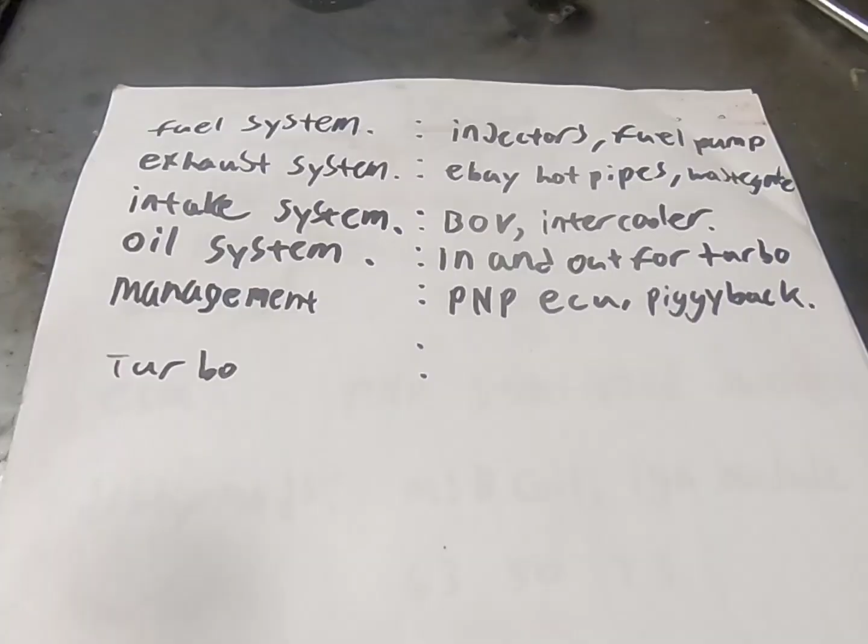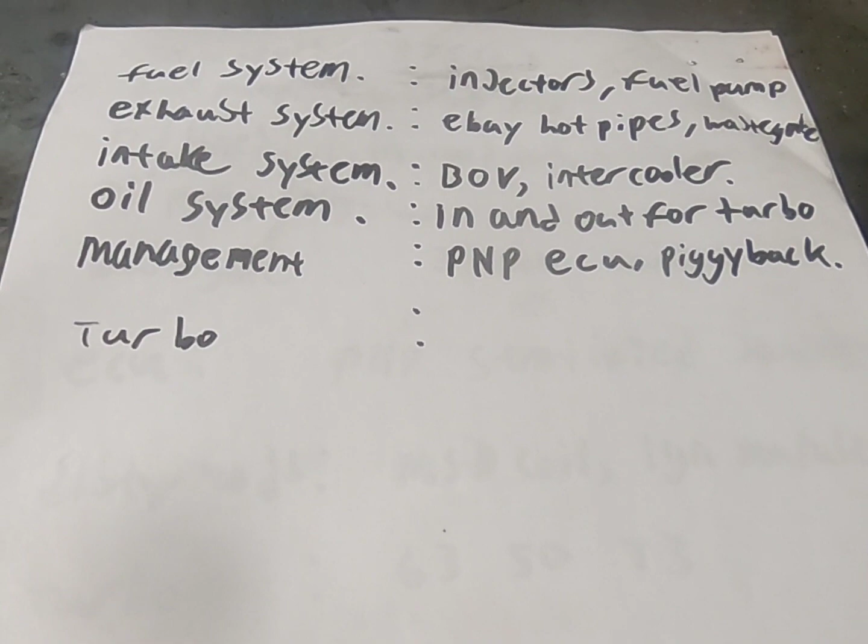There's 6 parts to turboing a vehicle. You need a fuel system, injectors, and a fuel pump. That's what you need at a minimum. And an exhaust system. You can either go on eBay, get hot pipes. You need a wastegate. You need an intake system, so you need turbo pipes from your cold side on your turbo to your intake. You could get a blow-off valve and intercooler.

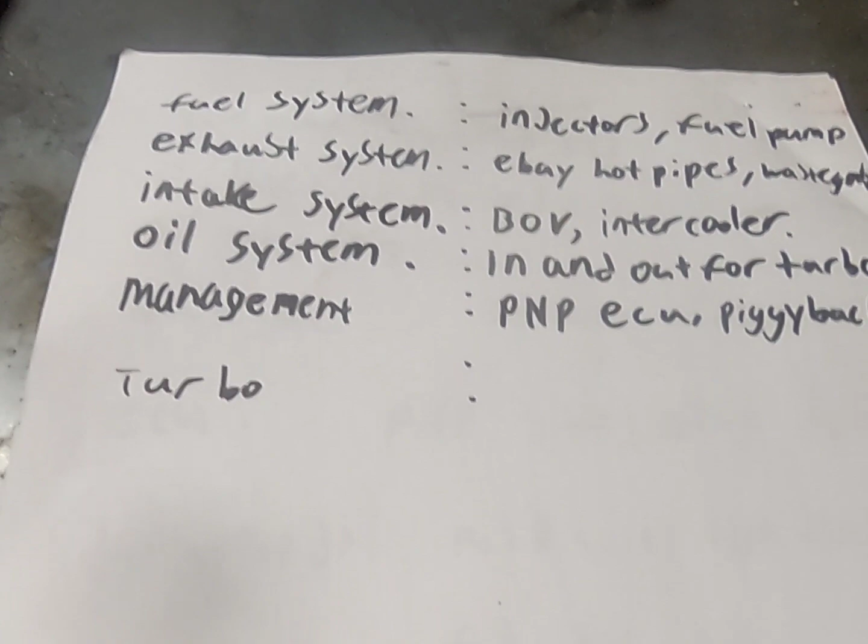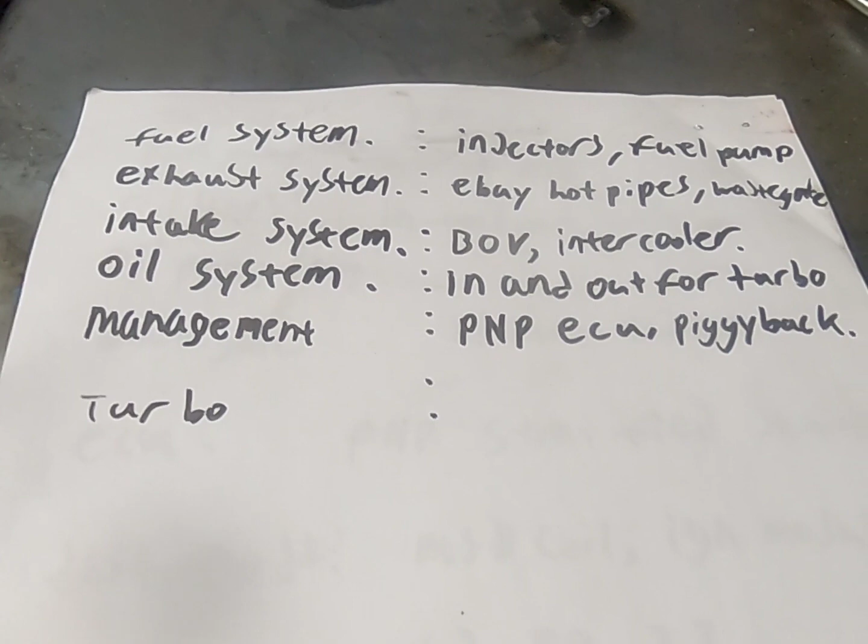You do not need a blow-off valve, or you do not need an intercooler. Those are optional. Blow-off valve is letting off pressure when it's not needed, when your throttle plate closes. And people do say you need them. You do not need them. If you let off and you don't have a blow-off valve, it will come out of the turbo. It is harder on things, but it does still work. I've used it. I've never had a problem. I've not used it, and I've also never had a problem.

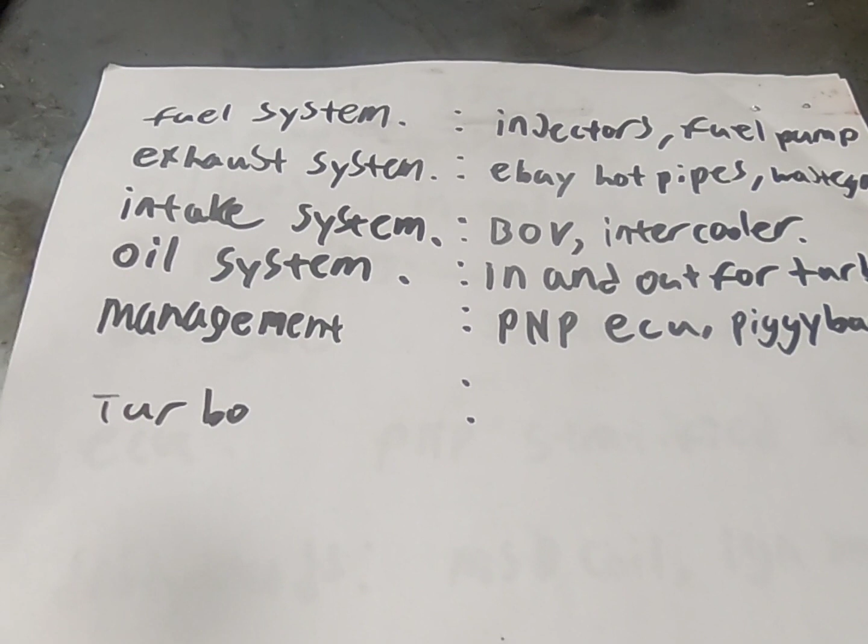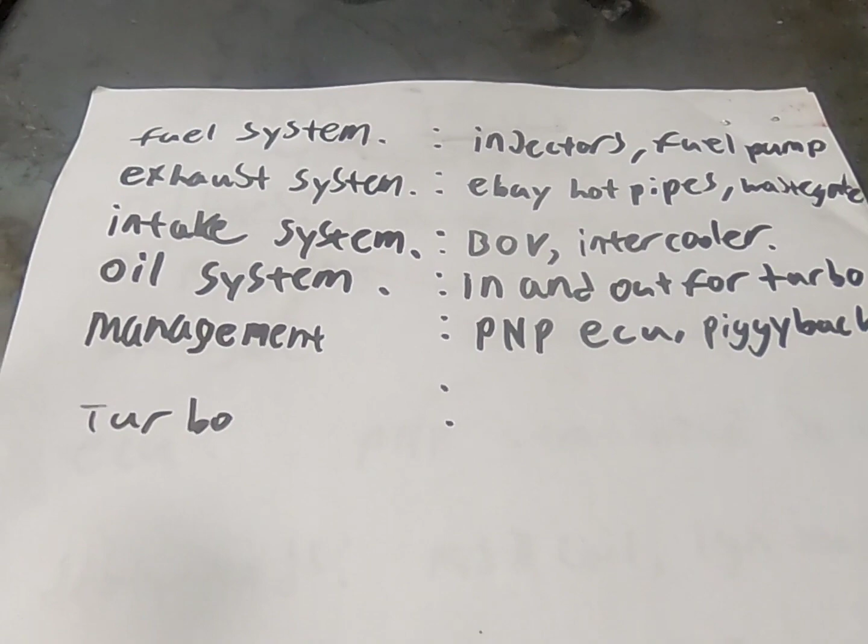Intercooler, you need it for high boost. You do not need it for low boost. That is my opinion. Anyways, your oil system, you need in and out for your turbo. You need oiling to go in your turbo with pressure from your oil pump, and you need it to go back into your oil pan. So there's other turbos that do not need this because they have their own system of oiling, so it's not connected to the engine's oiling system. But most cheap turbos, and turbos in general, have an in and an out for turbo oil.

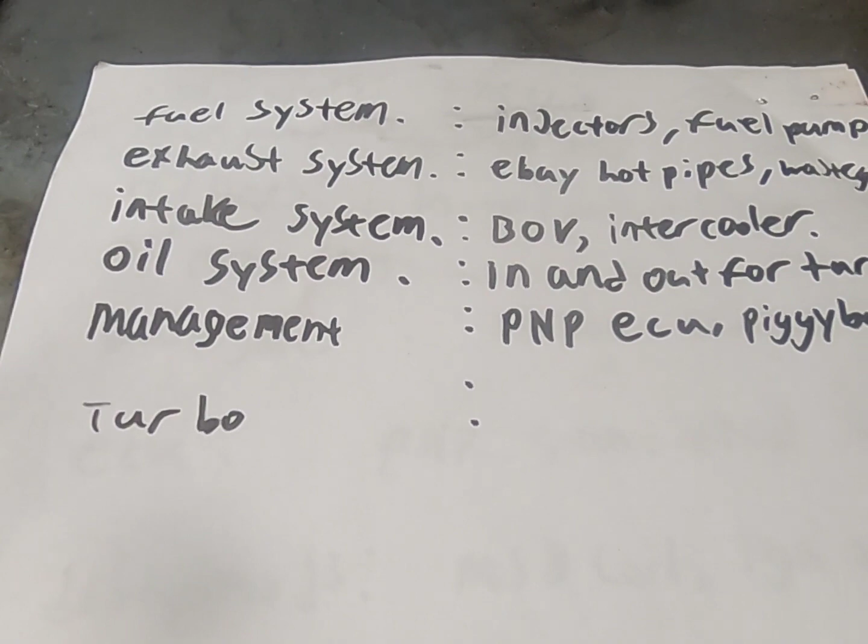And management, you need to be able to turn up the fuel for the air that's compensating, and you need to change your timing. So you either need a plug and play ECU, a piggyback ECU, or you can get somebody to flash your ECU.

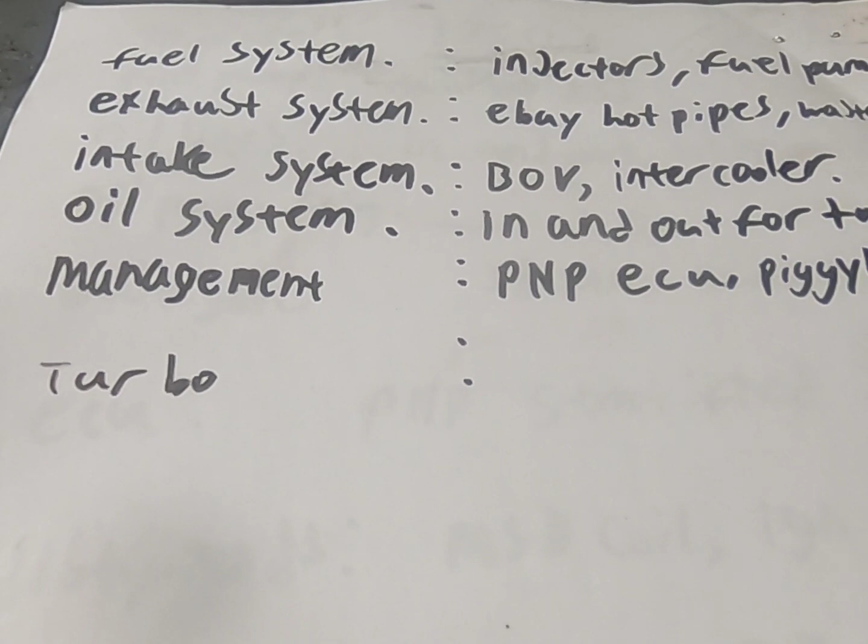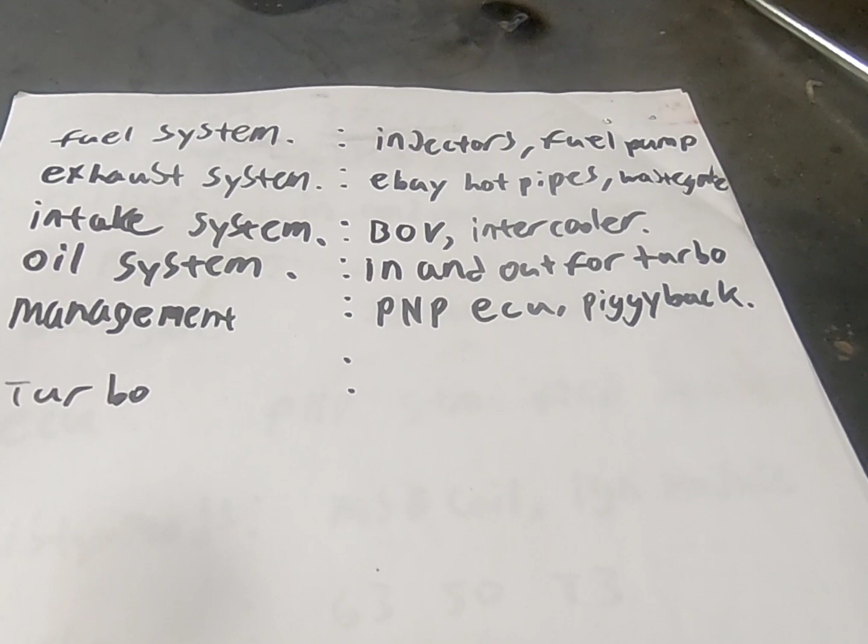And you also need a turbo. You can make endless choices on that. You can go from a small turbo, big turbo. Big turbos, they're more laggy. Small turbos, they have less lag. You can get dual scroll turbos. There's lots of options, but I'm gonna say what I'm going with so you guys can have a list of what I'm doing to mine.

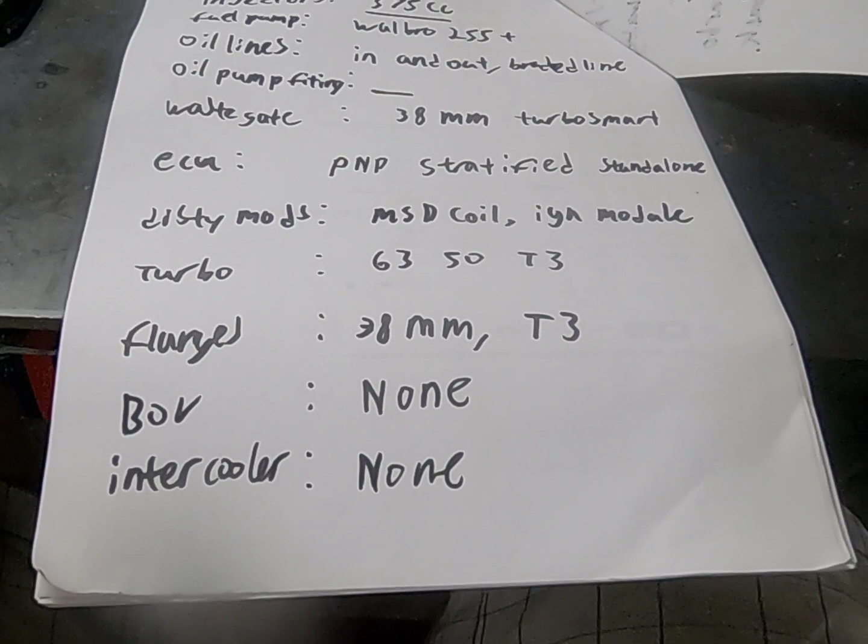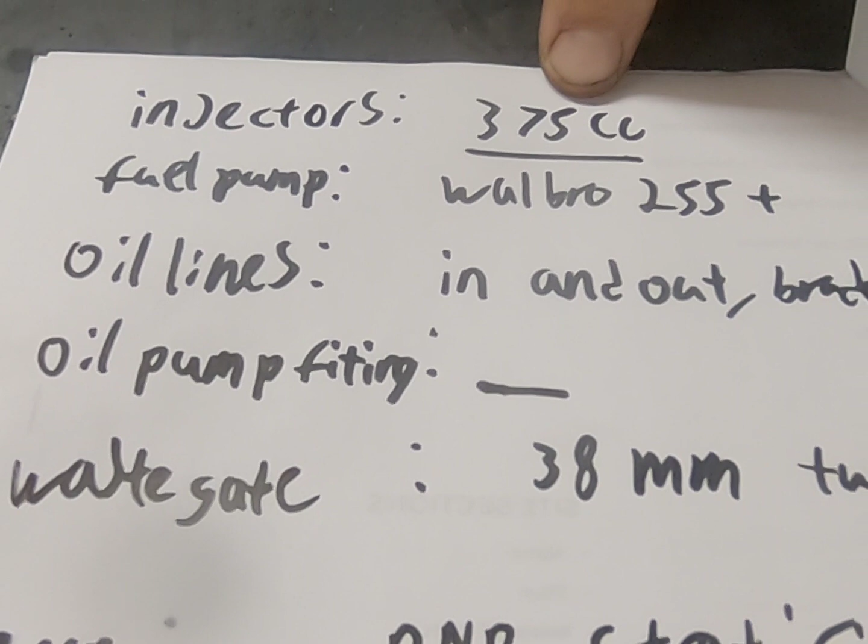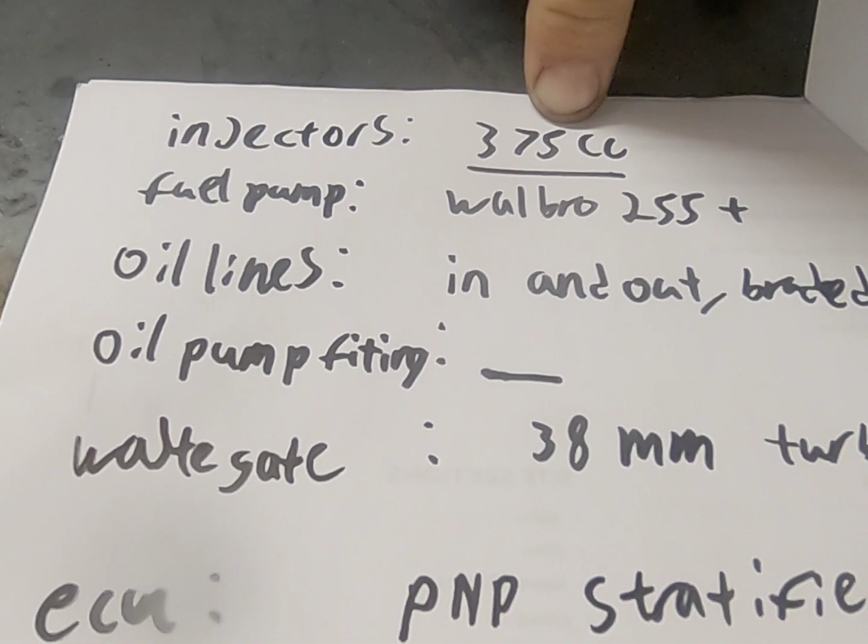When I turbo my cars, I keep it stupid simple because if there's issues, it's easier to fix. It's easier to pull the engine out, easier to pull the tranny out, less stuff in the way, cheaper. So I'm gonna tell you what I'm running in this red car. So for injectors, I'm gonna run 375cc injectors. I had to modify them into my rail, and I'm completely cool with that. I made it sleek, so it's actually smaller rails than stock, but pumps out more power.

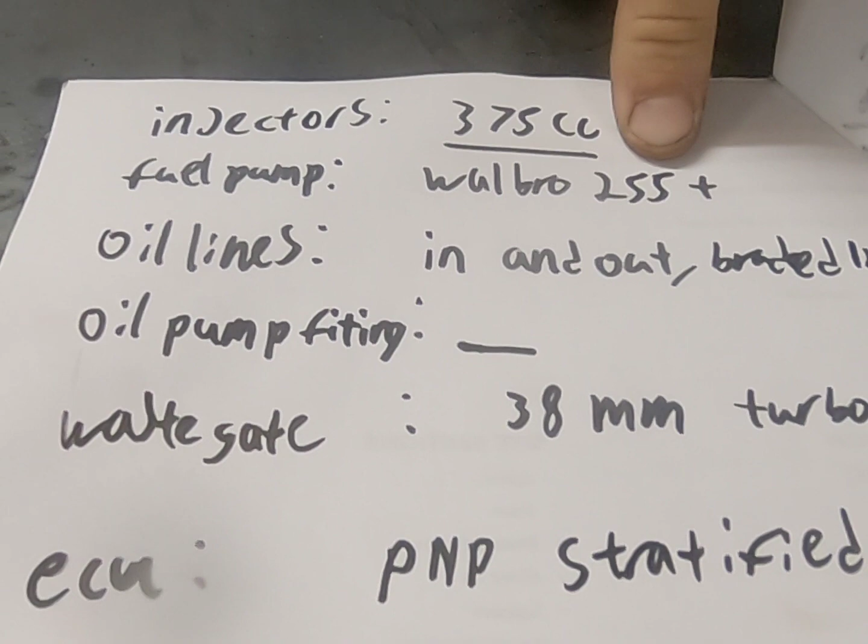Fuel pump, I'm gonna run a 255 Walbro or something larger like an AEM 500, but at a minimum, I'm gonna do a 255. For oil lines, I'm doing an in and out with braided to pass tech.

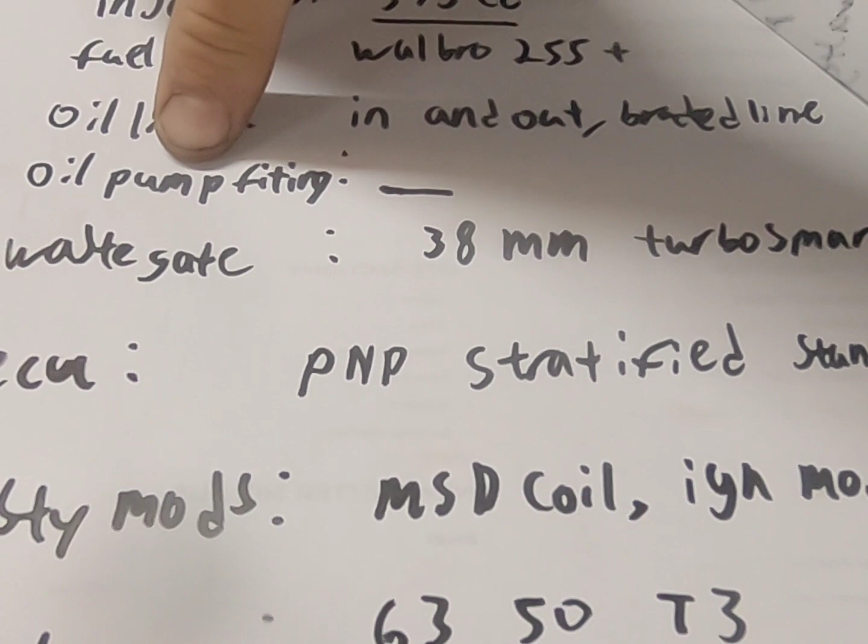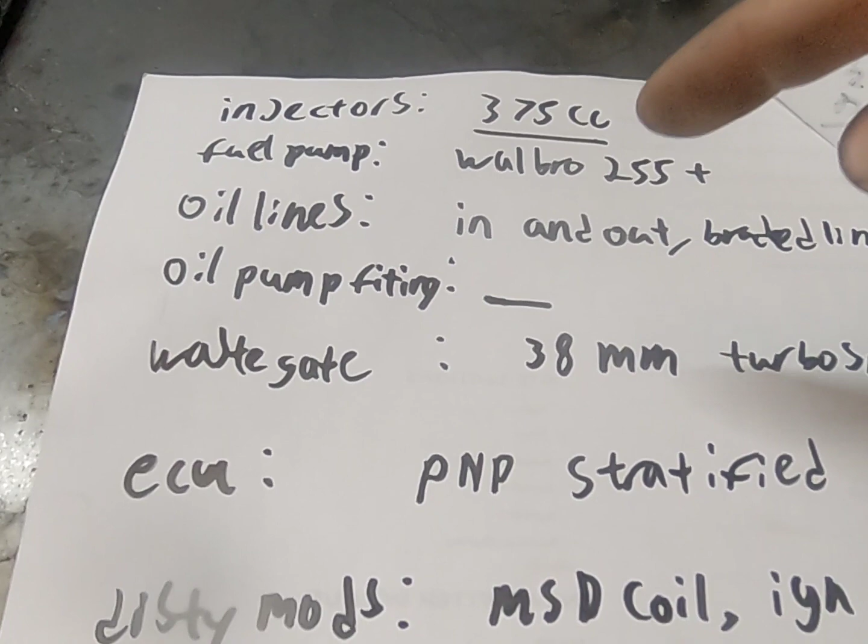If you want to drag race, you need a braided line in and out. Oil fittings, I'm gonna show you what I have there. If you're going straight to your oil pump, which I do, because I think that's the best place to get a source for oil, you need a fitting that adapts from your engine block's hole for your oil pump to an oil braided line fitting. I will show you that in a couple minutes.

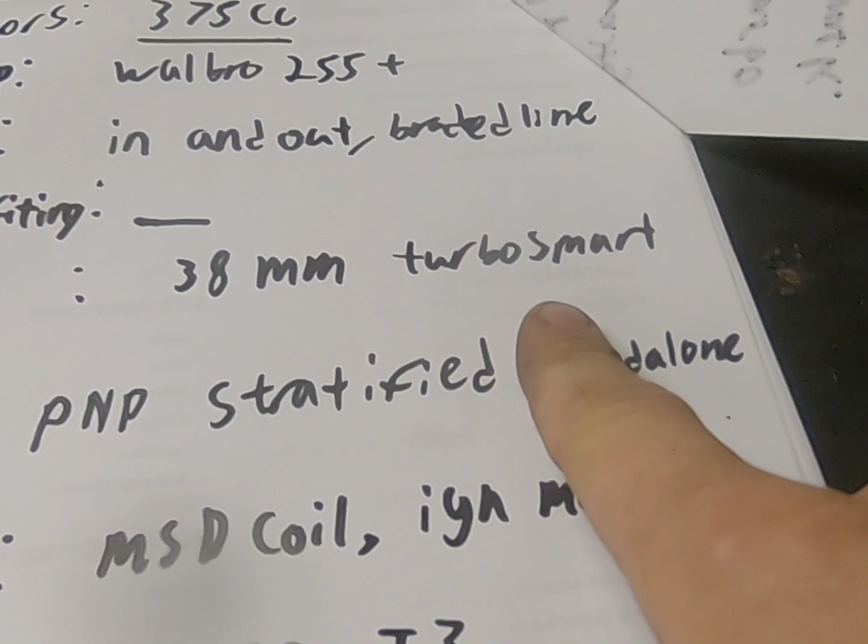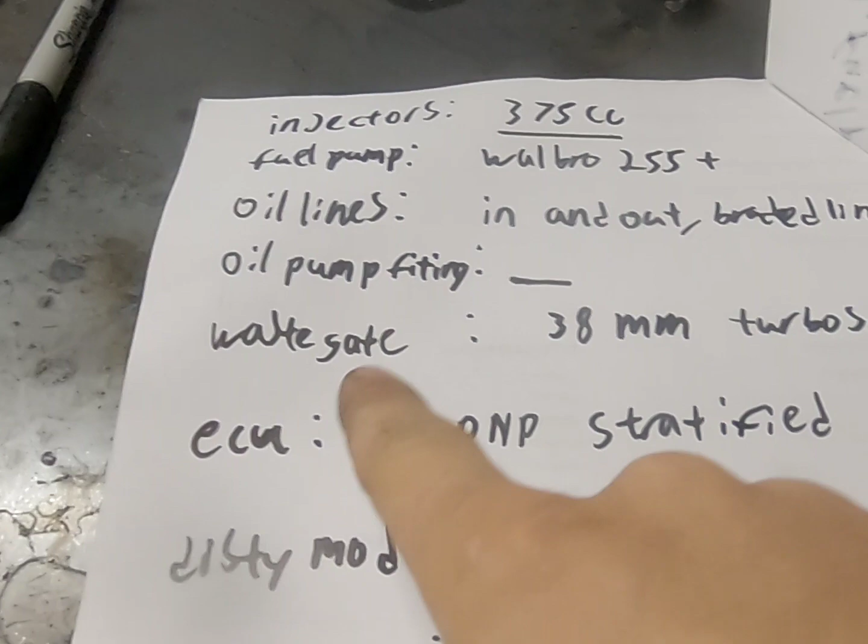Wastegate, I'm gonna run a 38 mm Turbosmart. That's more than enough for a smaller engine to get the air out. So what wastegates do is they let air out when you want your turbo to stop spooling up. Because if you don't have a wastegate, your turbo will spin to the moon and overboost.

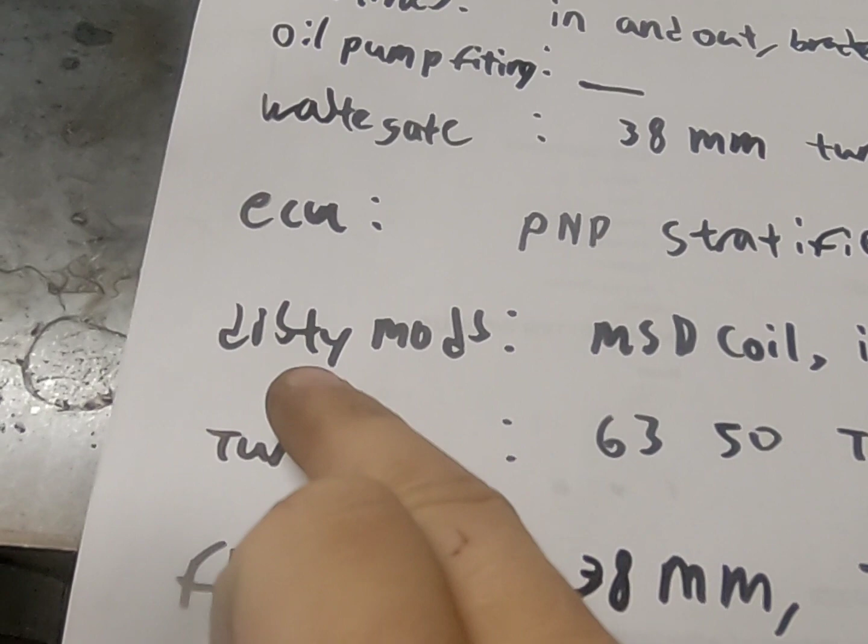ECU, I'm gonna be running a PNP stratified standalone. I can tune it from my computer. I'm used to it, so I'm comfortable with that. I'm gonna do Disty mods, which is distributor. I'm gonna do MSD coil and ignition module to get a better spark because the factory system in my car is garbage, in my opinion. So it needs replaced, it's not reliable.

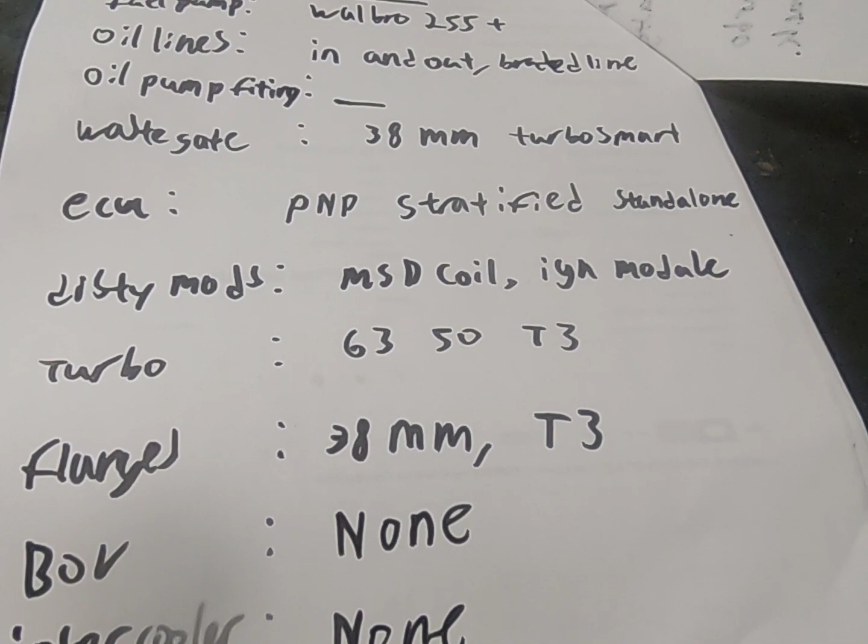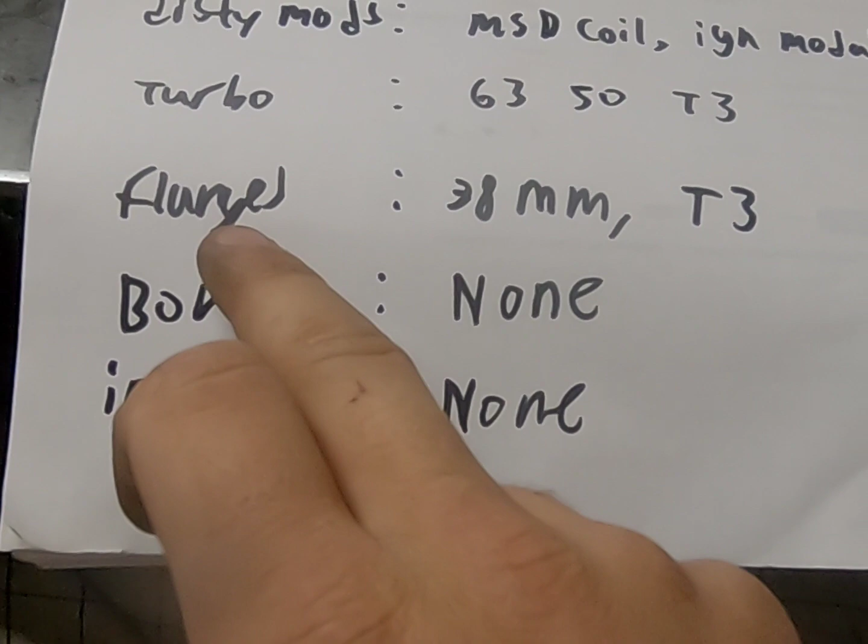And for turbo, I'm running a 6350 T3 flange. So it bolts up to a T3 flange, and the hot side is 63, the cold side's 50. For the flanges, I'm buying flanges because I'm making my exhaust system. I bought a 38 millimeter flange for my wastegate and a T3 flange for my turbo.

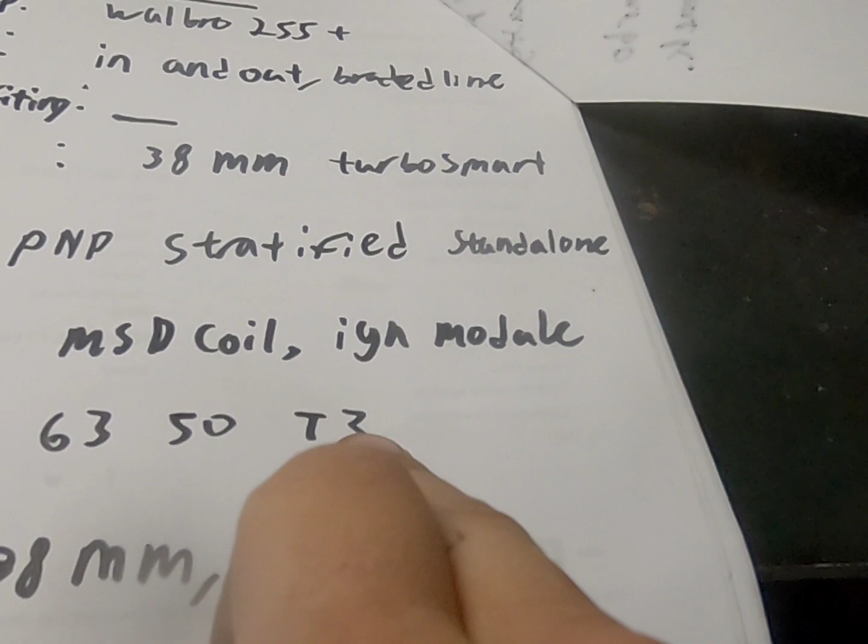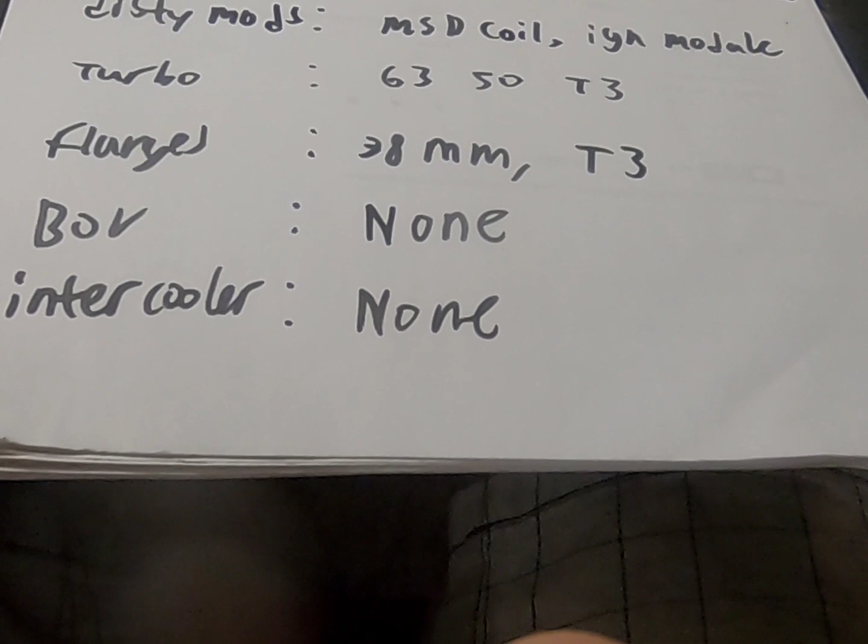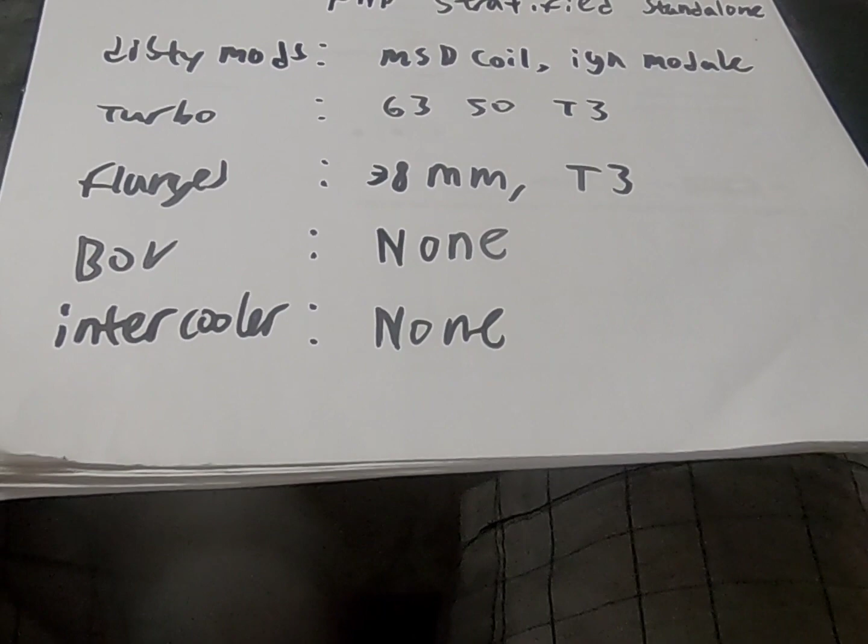My blow-off valve, I'm not using one. And intercooler, I'm not using one. Blow-off valve, you do not need. It's optional, believe it or not. An intercooler, you do not need one as well. Without an intercooler, your intake pipes get a lot shorter because you don't have to route them behind your bumper and then loop them around everything that's in the way and back to your intake. It's a pain in the butt to route them. It's a pain in the butt to make them.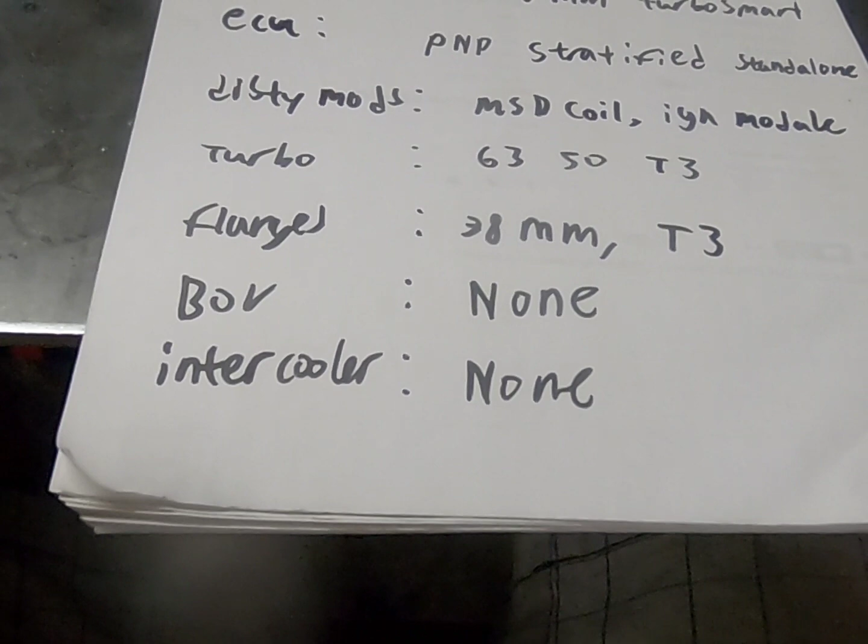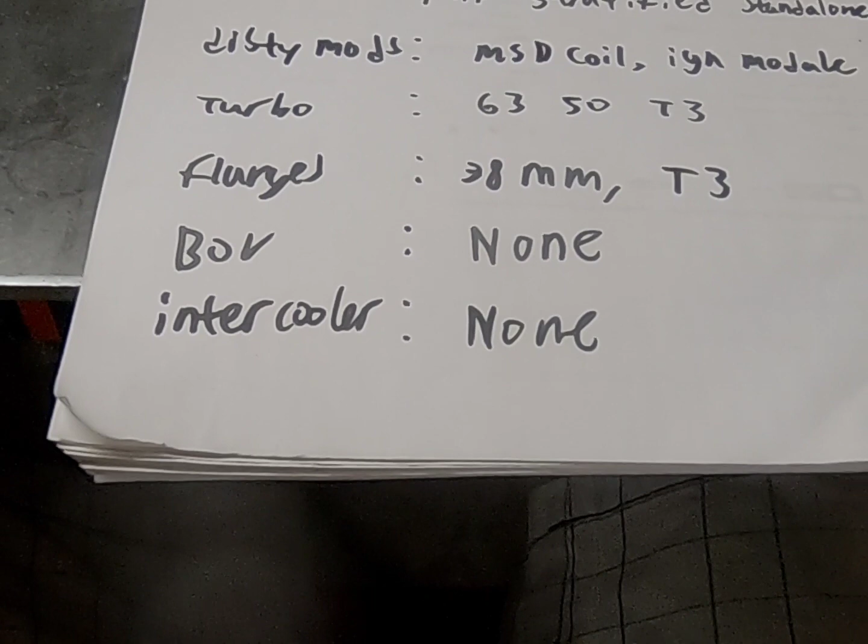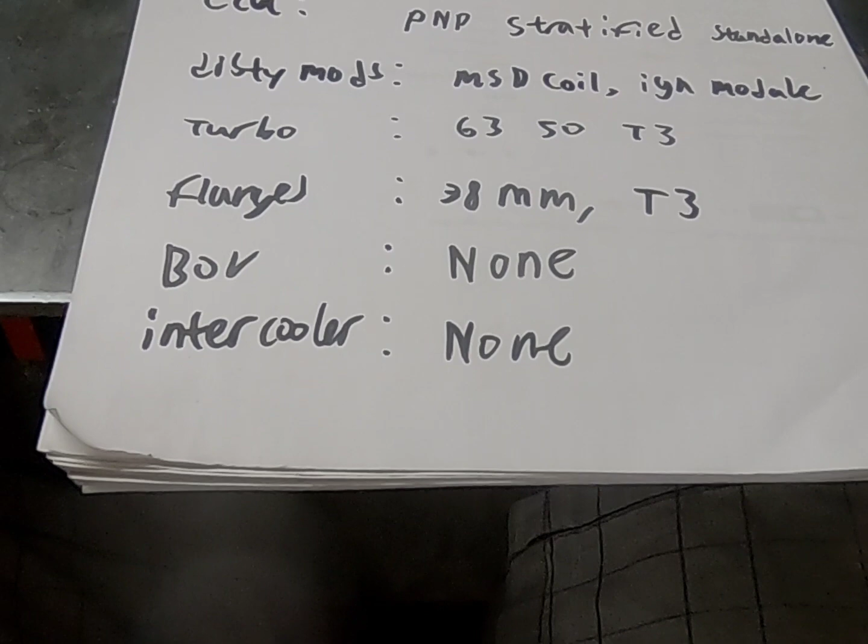If you just run a turbo without an intercooler, all you need to go is from your turbo to your intake, and then you're done. So much easier to remove, just less bullshit. And yeah, blow-off valve, you don't need one, because when you let off the throttle, the air will come out of the turbo. It is harder on your turbo, but it will not make it fail. From my experience, it's fine. It sounds great, very loud blow-off noises, and it just is cheaper. It's less vacuum lines and all that.

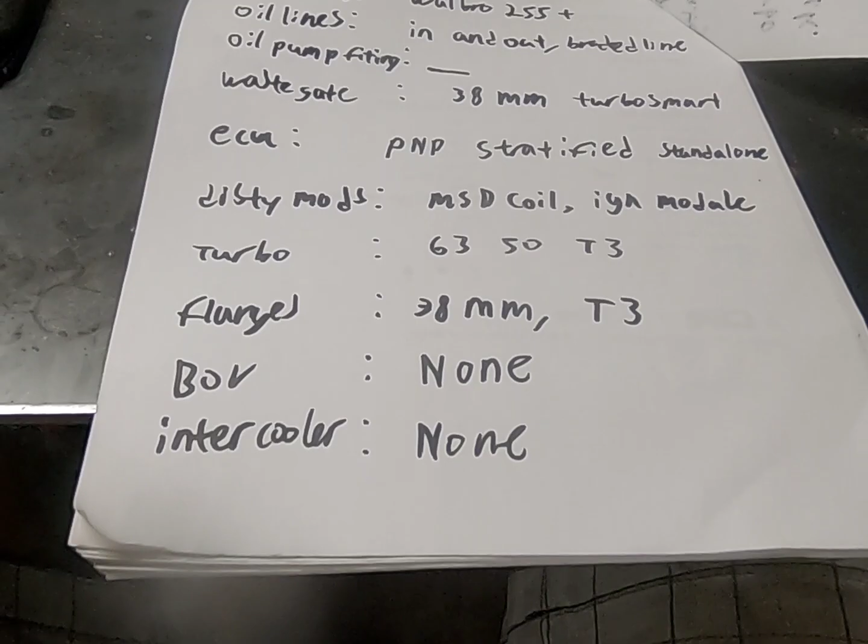So yeah, this is the system I'm gonna be running, and I am going to get a start on it. This is the fitting I was talking about. So this side goes into the engine, which is the oil pump, and this side goes to a braided line that goes to the turbo. In my opinion, this is the best way to do it to get proper oiling.

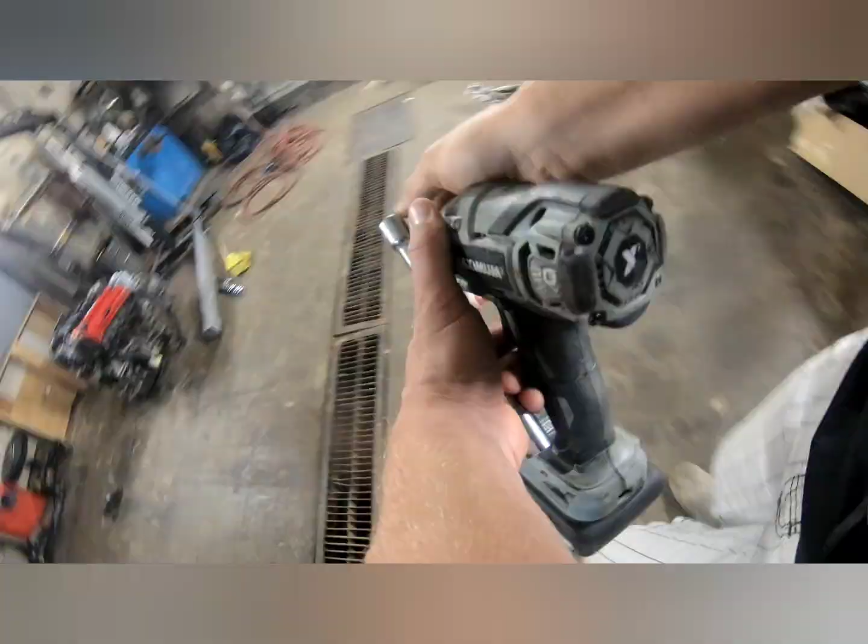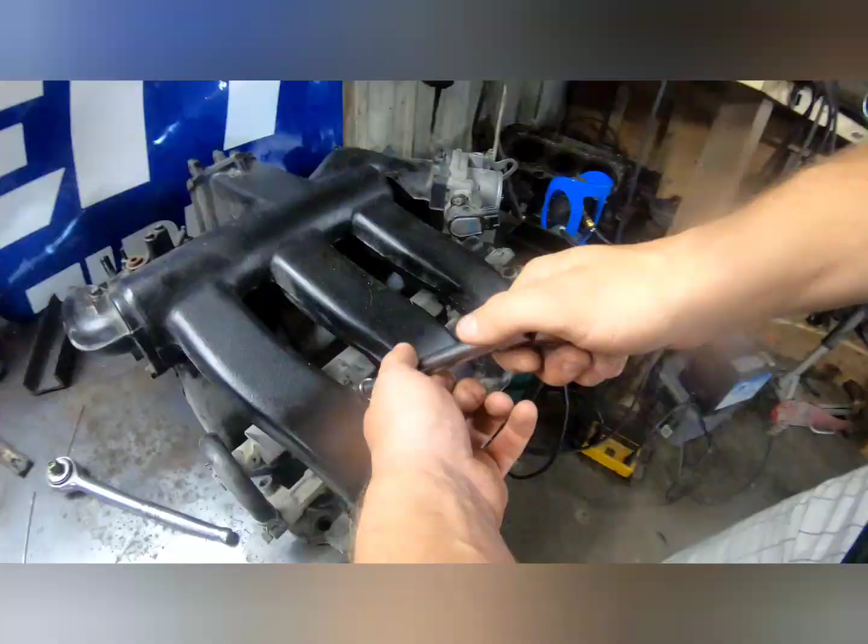Okay, I'm getting right into it. I'm taking off the intake and I'm gonna do the injectors. All right, I'm gonna take the injectors off of the intake now and go from there. Okay, the intake is off. Now I've got to remove all these little screw heads to get to the injectors.

The most important part of a turbo setup is getting the fuel system right. You need a fuel pump, you possibly need bigger fuel lines, bigger fuel injectors, for sure. So right now I'm just gonna be taking out the stock ones and installing twice the size injectors, because I know I'm gonna be pushing at least twice the fuel from factory.

Say you turboed your car and drove it. You hit the gas and your turbo spools up and it starts forcing air into your intake. Your computer doesn't know what to do, and it pretty much doesn't change anything from what it would have been, maybe a little bit more, but there's forced air getting into your engine and your injectors can't keep up, your ECU doesn't know what to do, and that could cause a lean condition because there's more air than the fuel that it thinks it's getting.

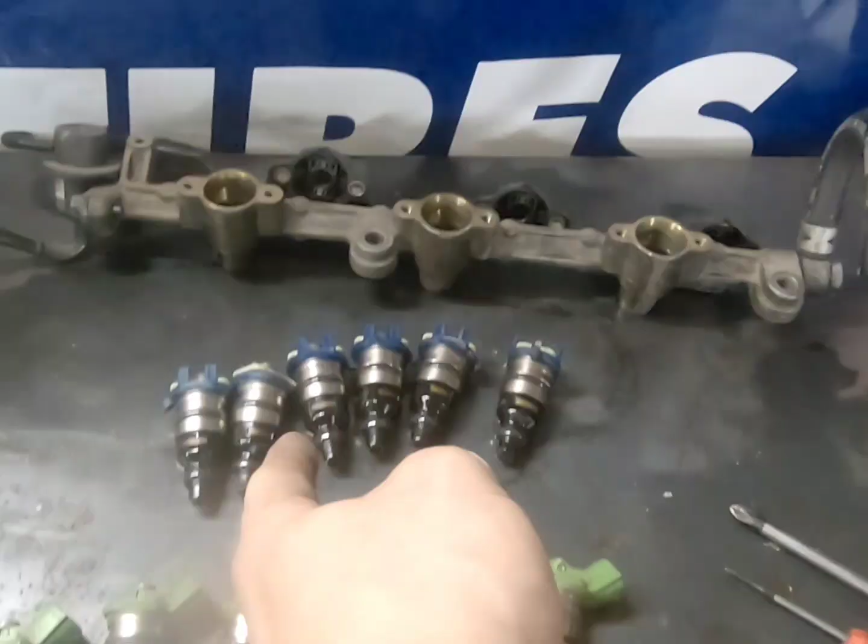So that could self-destruct the engine. So you always want to get fuel injectors and a fuel pump at minimum. Turbochargers force air into the intake, and to compensate and make power, you have to force more fuel into your intake as well. Here are the old stock injectors, and here are the new injectors that are twice the size in CC. These ones are 350 cc each, so it should do the trick for low boost, no problem.

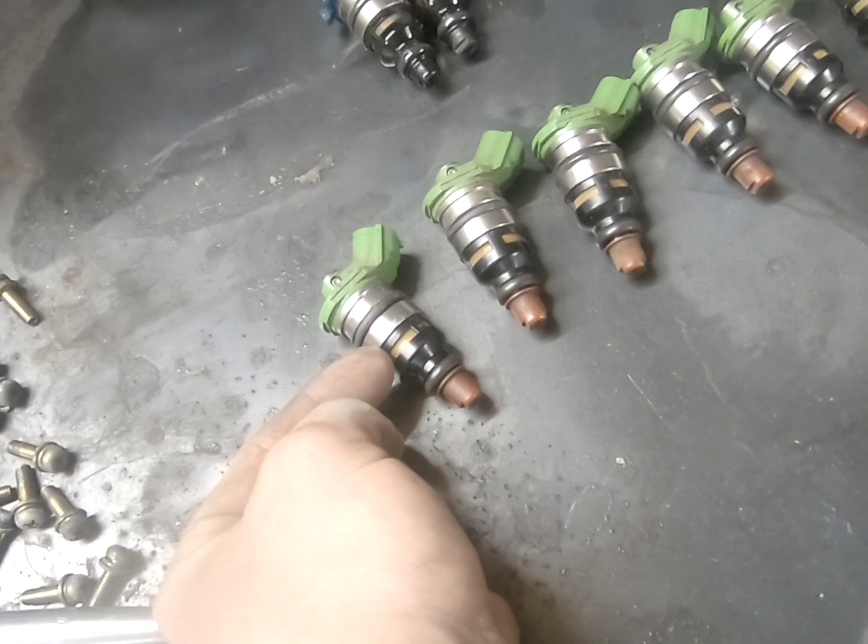So the way these work is there's an O-ring here, and then there's an O-ring here. This one blocks the fuel from the fuel rail from going in the engine uncontrolled, and this one stops the fuel from coming out the top of the injector rail. So fuel is constantly in between these two O-rings here, and it gets fed through this little screen right here, and it gets sucked in as the injector needs, and it squirts in with very, very quick bursts of fuel. And that's all timed through voltage and through your computer timing with the injectors and all that good stuff.

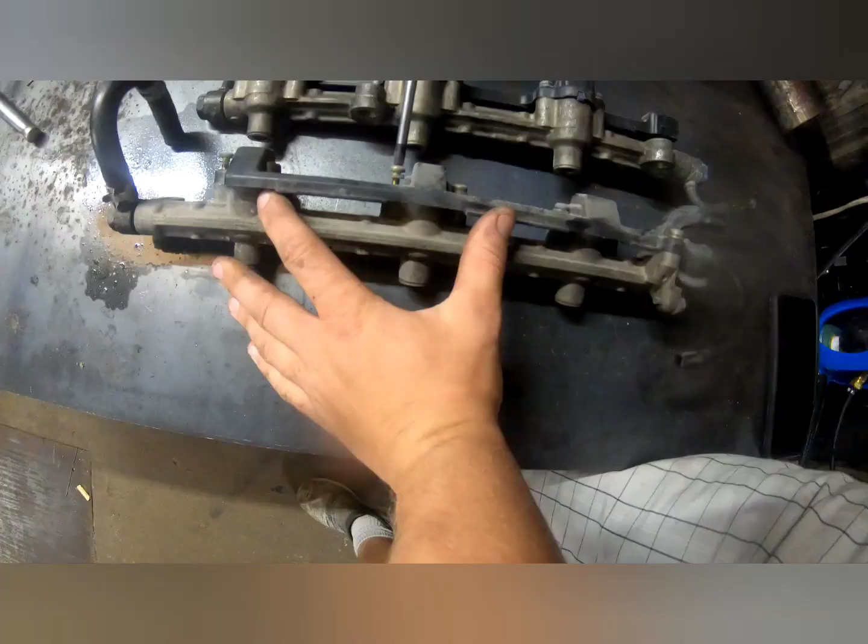Here's the top of your injector. To get them out, you just gotta spin them and pull them out. This is the empty fuel rail. All I gotta do now is push them in, and later on I'm going to have to make a wiring harness for each one and each rail and have them plug into the factory wiring harness.

So that's the trickiest part, is making the wiring harness, because these ones, they're wired in through two prongs on these stupid plastic things in there, but that doesn't work with the aftermarket stuff, right? So I'm gonna have to make a wiring harness after. That's no problem. I've done this multiple times on the purple one. My injectors on the purple one are the exact same style, but mine on the purple MX3 are 875 cc.

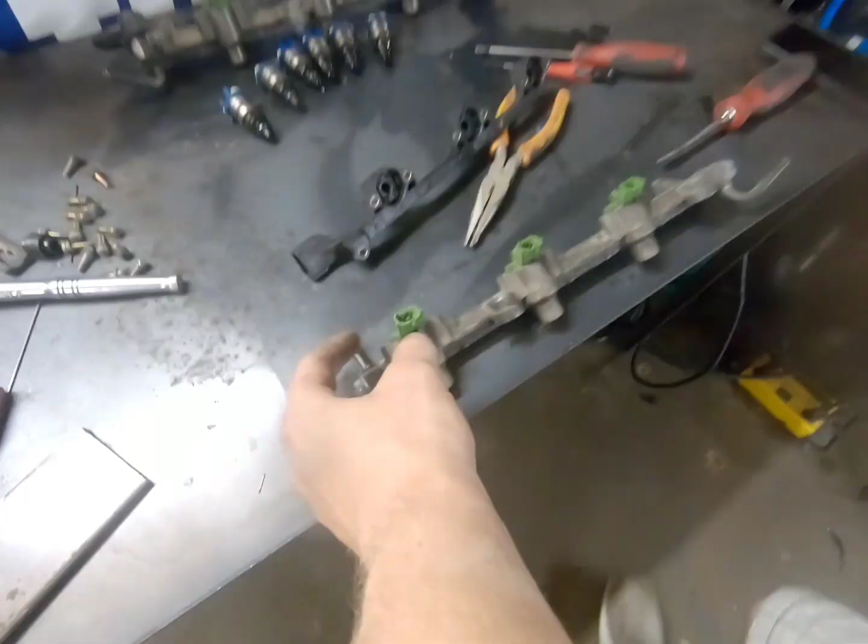Okay, I would say that I'm done, but I'm not. I'm far from done. The injectors are in the rails, so the only thing that has happened here is the injectors are in the rails. So it still needs wired. It still needs custom pieces made to hold them in.

So today I'm going to make TIG welded pieces of stainless or steel, I haven't decided yet, and I'm gonna weld little straps that go from each, because when there's pressure from the actual fuel pump, it could pop them out. On the stock system, this stock setup would hold them down, so you didn't have to worry about that for stock. But I have to for this, obviously. Not a big deal. It's a lot of fun making brackets, and I'll show you how I do them.

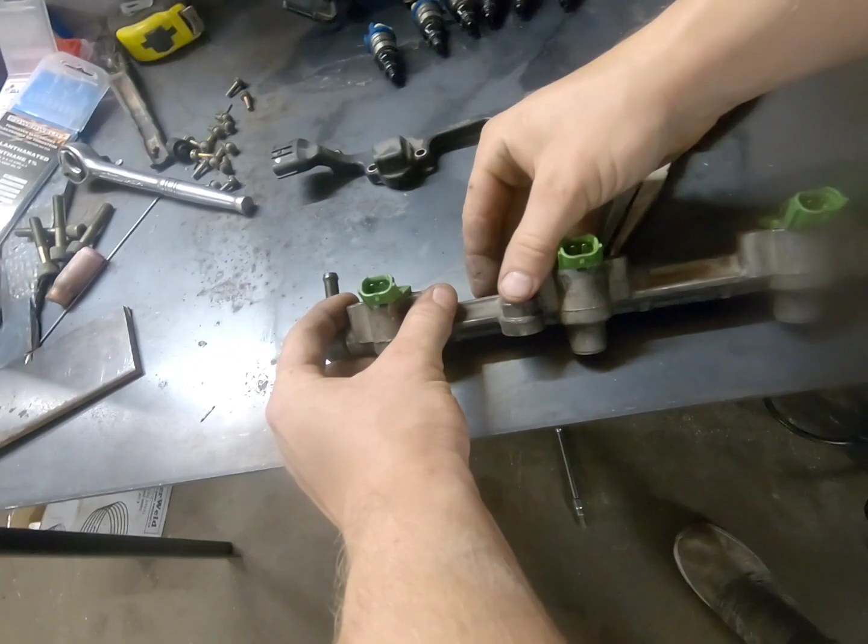And at this point, I do not have connectors. Well, actually I do, right here, but I'm gonna get brand new ones because that's how I roll. They're not expensive, and I like having things on my fuel system very respectably clean.

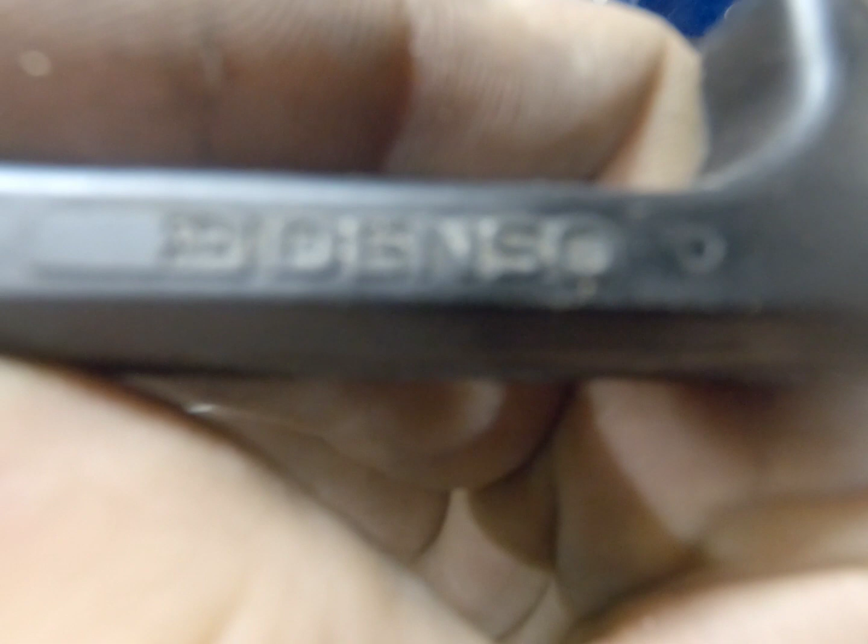Anyways, I'm going to order up some of the connectors, and on the top of my injector rail that's factory, which I'm not using anymore, it gives you hints on where you can buy connectors for it. So I think, no, I don't have it upside down. This says Denso. So I'm gonna go on eBay and look up a Denso connector for an angled injector like this and order it. I'll leave a screenshot in the video.

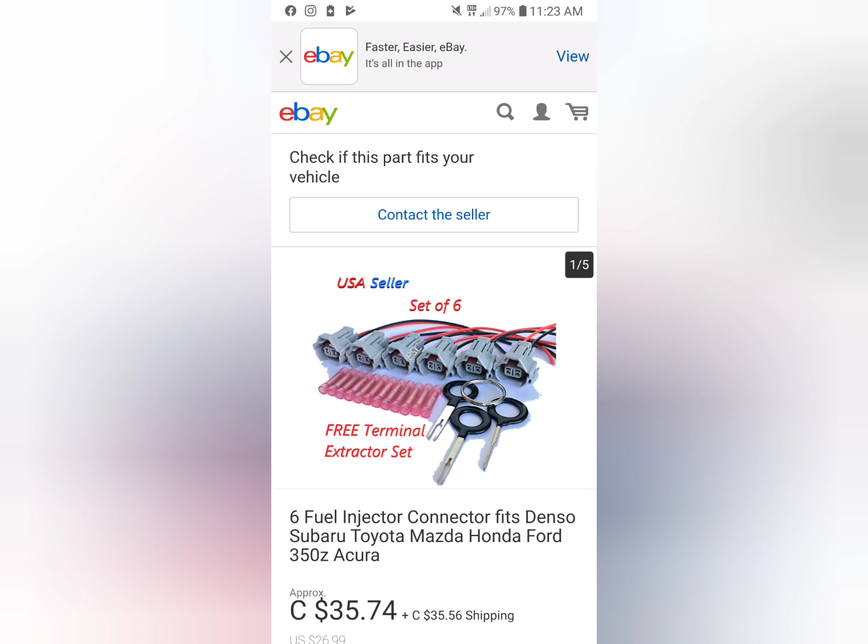Okay, I just cut these 2 pieces of steel here. I'm gonna use this top one. Oop, that's really hot. I'm gonna use this top one for going across on the top of the injector, and then I'm gonna bridge down from here to here with the small strap, and then it'll just be screwed in so this injector cannot go up. So now I'm just cutting them out.

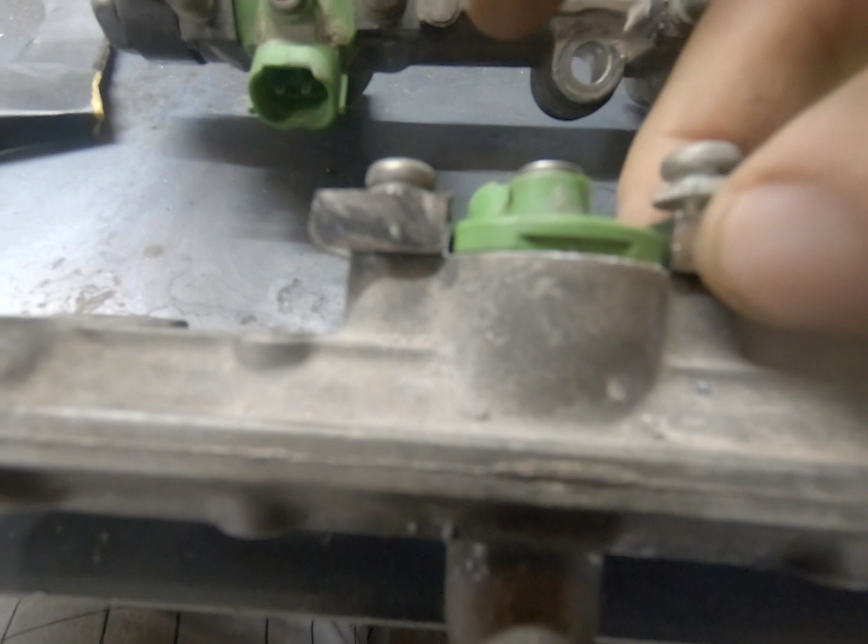Okay, I'm making the brackets for the injectors, and what I did was just cut out of like a 1/4 inch plate, and now I'm gonna add a smaller 1/8 piece there, so when that's tightened, it's holding down that green piece of plastic. So what I'm gonna do is tighten these down, tack the ends with my TIG, then I can take them off, fully weld them, and grind them up, make them look pretty, paint them.

Okay, so what I've been doing here is welding up these top pieces. I welded the exact thickness of the plastic right here, this thickness right there, down on here. So I can easily weld while not burning up my injector. So I can place a piece here and then place another piece on top, and then that acts as my cap, like these ones. Okay, it's time to weld them all on.

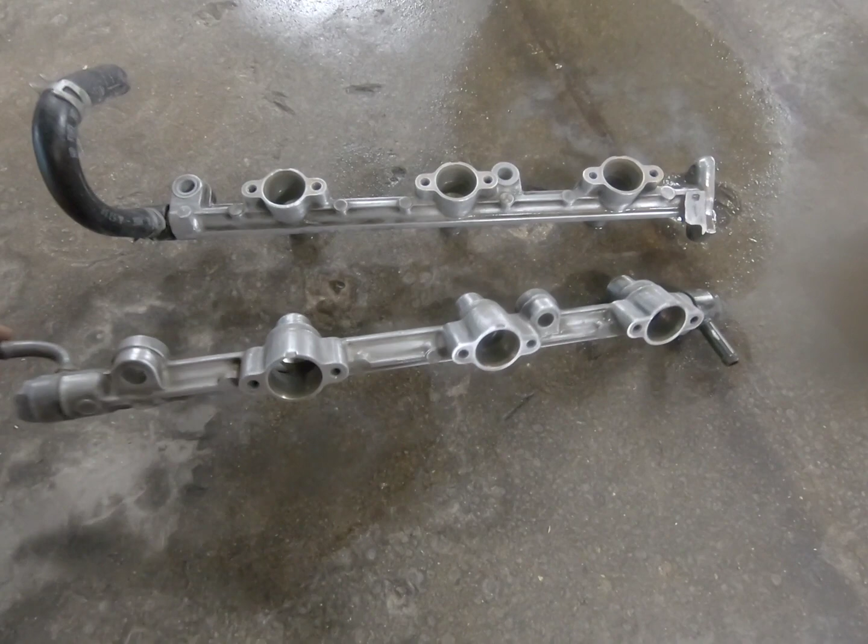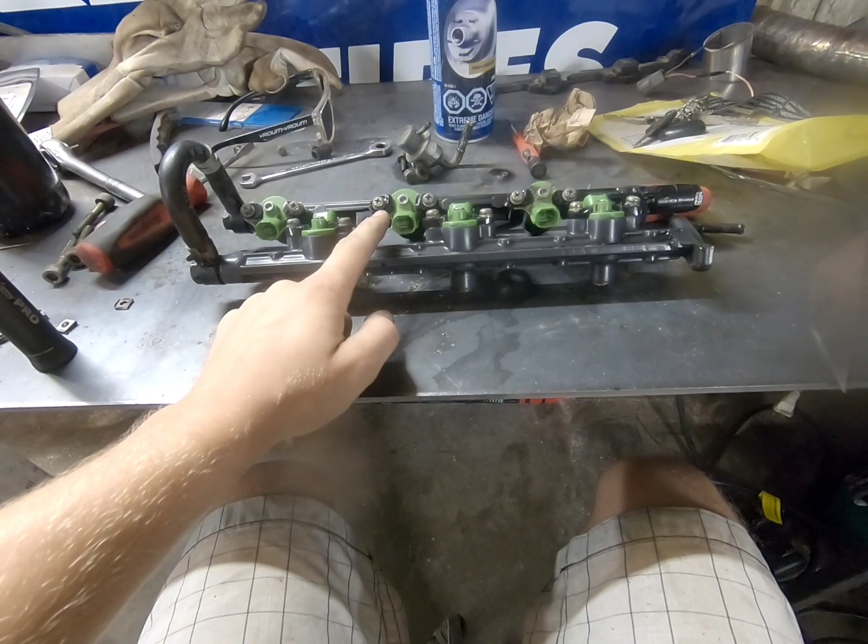But before I do that, I'm gonna clean these rails up and make sure they're not full of any things that'll contaminate my fuel. And I'm gonna sand the outsides and paint them, and also cut this tab off because I'm not running this stock piece anymore. So I don't need that, and I always tend to get rid of things I don't need.

So got them all sanded up. They're looking good. I took the casting flash off this side on both, make them look a little bit more presentable. Cut off the pieces I don't need. Ready to rock, gonna paint them. Painted all these little guys up. They're ready to go on to the rails. I homemade TIG welded retainers for my injectors. Turned out pretty good. All right, I'm happy with that.

Looks good. Pieces are cut out that aren't needed there, so it's gonna slip in and out of my intake a lot easier, because normally there's this big piece of shit on top, and it's really hard to get them in and out of the actual intake. So this is gonna be much easier to work on in the future, so I'm pretty happy about them.

Each fuel rail is gonna have its own wiring harness to a plug that's on my factory wiring harness for the MX-3. I'm just gonna have to buy connectors and make my own connectors to go to the stock harness. Not a big deal, just order some 4-pin connectors on Amazon, whatever, and I'll show you how to wire it up later, but I gotta wait until they come in.

These injectors are 375 cc, if I do remember correctly. They are off of a 323, and it's an easy, cheap injector fuel system. Other than you have to either buy retainers or make them. I made them. It wasn't a big deal. It was good that I got some practice on the TIG for really small stuff, because those are literally smaller than my thumbnail. So it was good practice for low amps and all that stuff. So yeah, I'm gonna continue with the injectors later, and I'm gonna move on to the engine.